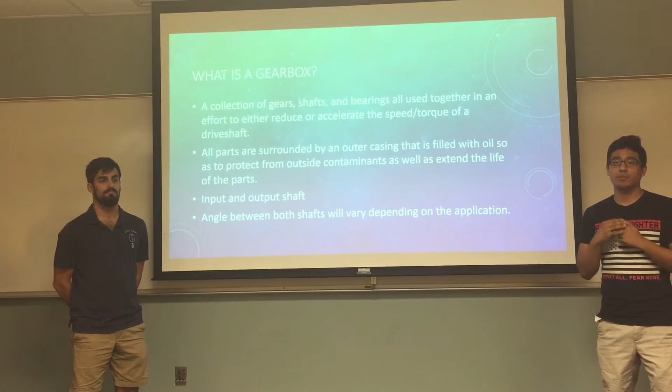A gearbox is a collection of gears, shafts, and bearings all put together in order to be able to reduce or accelerate the speed or torque of the shaft. All the parts surrounded by an outer casing will be filled with oil to protect them, as well as from outside contaminants to extend the life of these parts. We will also have input and output shafts, and the angle between both these shafts will vary, depending on the application.

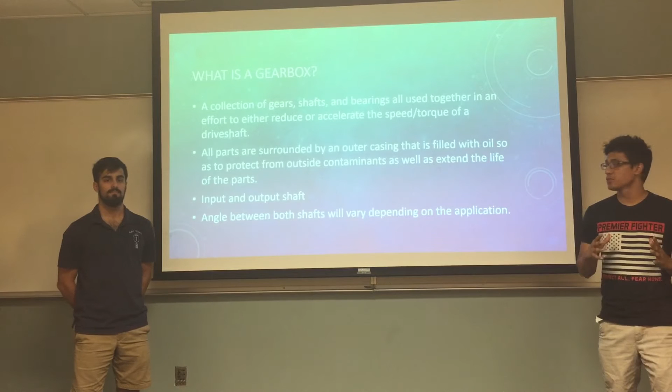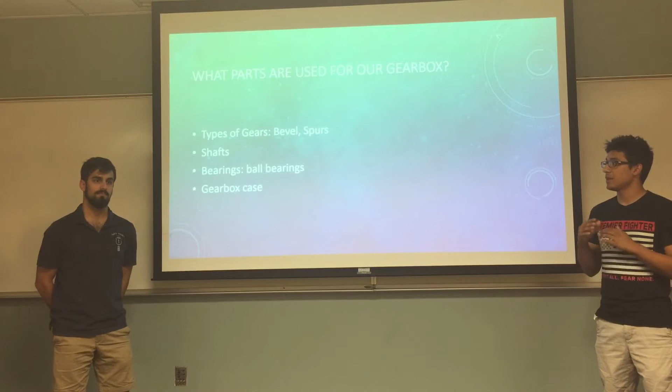The two types of gears we'll be using will be bevel gears and spur gears. We will be having many shafts inside this gearbox. The ball bearings will be used for our bearings, and the gearbox casing will, of course, be surrounding our entire system.

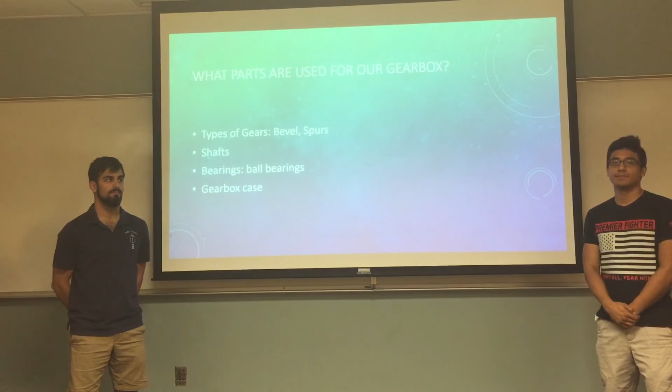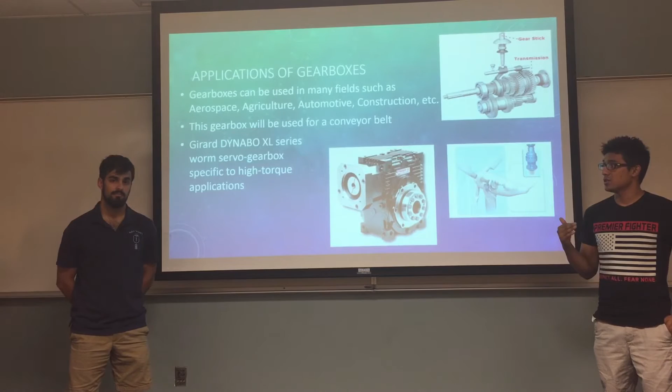Now, some applications for the gearboxes are very diverse in the engineering fields. We have them in agriculture, aerospace, automotive. This gearbox in particular will be used for a conveyor belt, and we did highlight one very good gearbox, the Dynabo XL series, which is specifically tailored to high torque systems.

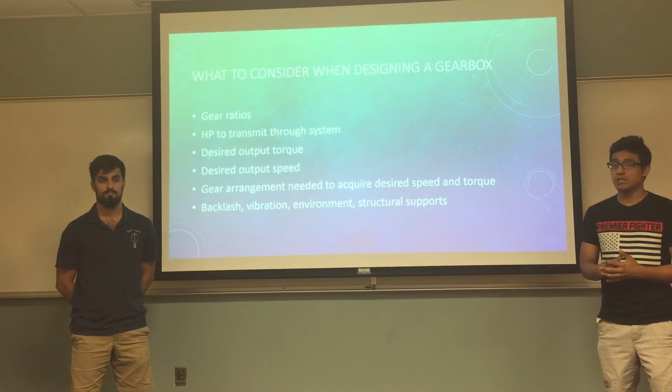So what to consider, we have to take into account the gear ratios, the horsepower to transmit through the system, the desired output torque and speed, as well as the gear arrangement needed in order to make sure that we do achieve this, and of course backlash, vibration, the environment and structural supports that could affect the gearbox itself.

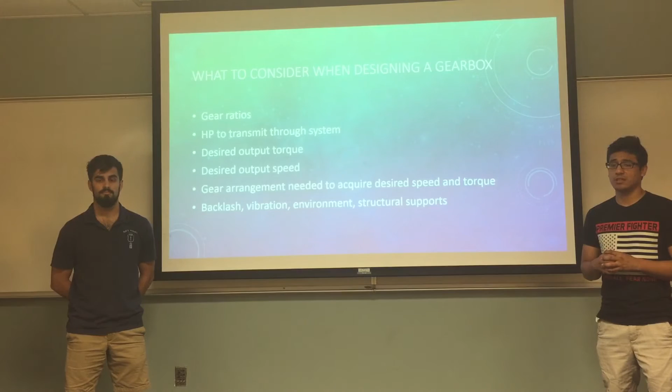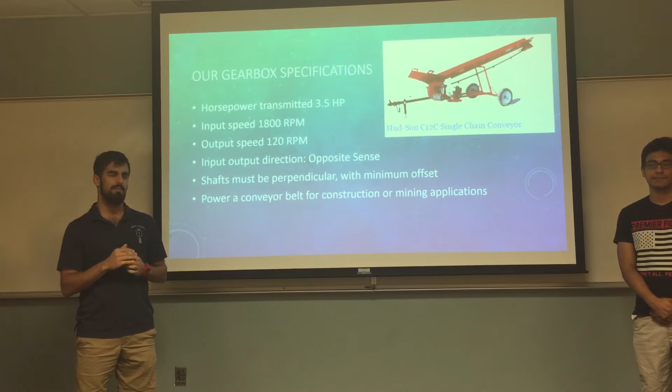Okay, so our specific gearbox, we needed to meet certain specs. So we needed to be able to transmit 3.5 horsepower. We needed also to do a 15-to-1 speed reduction. Our input speed was 1800 RPM. It needed to end up being 120 RPM. So also we had to make a perpendicular output shaft, and we also had to make it spin in the opposite direction.

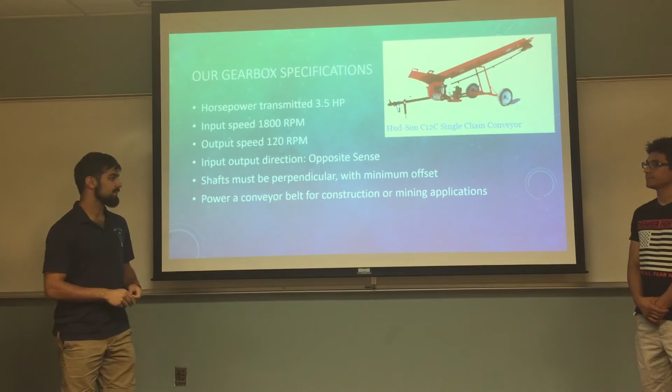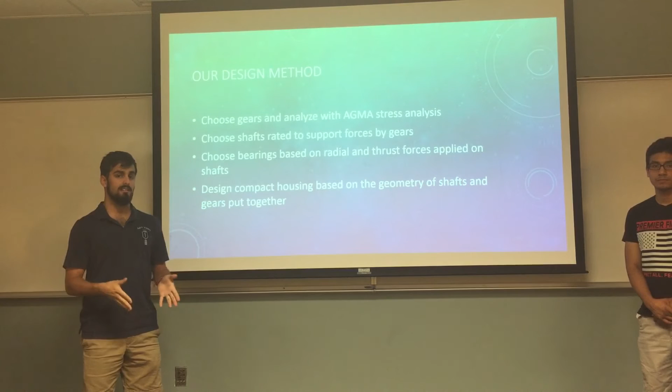So our design method, the things we used to basically pick our gears was based on the Boston Gear catalog. The catalog had many gears inside of it. We had to make sure the horsepower ratings were up to spec so that they would be able to transmit the 3.5. So the gears were also run through AGMA stress analysis for bending and contact wear. We were also able to make a housing for the entire gearbox, and we were able to fit everything inside as compact as we possibly could.

So the types of gears that we use here, there's a picture of it on the right side. We have a 3-to-1 gear reduction with bevels. This is what made the 90-degree output that we needed. We have a spur gear, which is a 2-to-1 reduction to an idler gear, which then goes to a 2.5-to-1 reduction. That makes our 15-to-1 reduction total. We have the last spur gear, which is actually cast iron. That's the only material that was different from the rest of the gears, and it's a pretty good example of what we did.

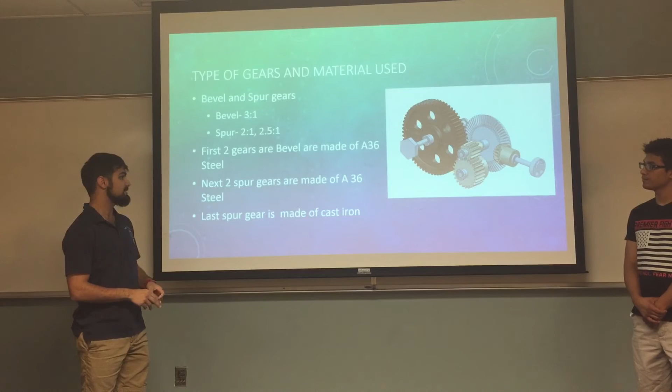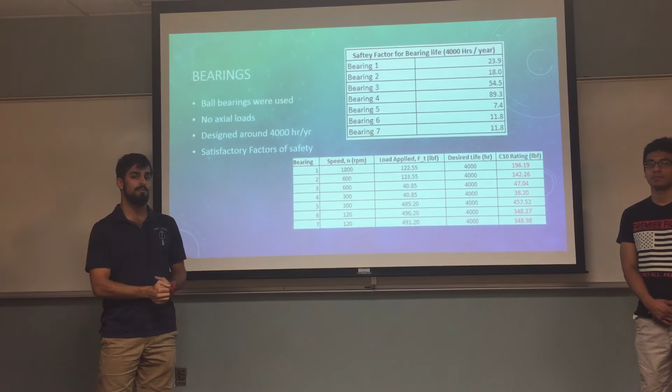Now for the bearings, we just basically had to choose bearings that were able to carry the load of the shafts. We were able to do force analysis on all the shafts, and then these are the bearings that we chose. We also rated them against 4,000 hours per year. When we did factor of safety on that, we were able to see that the factors of safety were very, very good. So the bearings that we chose definitely went above and beyond what we needed.

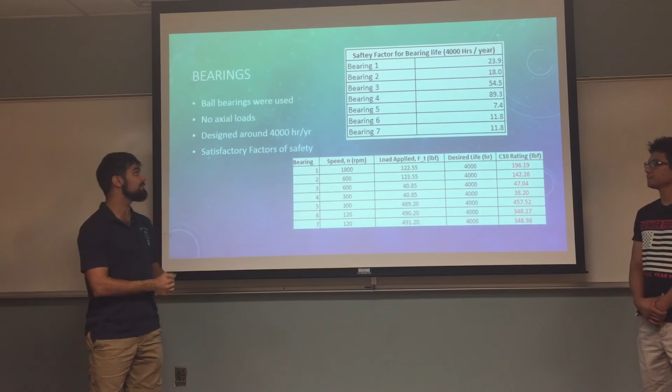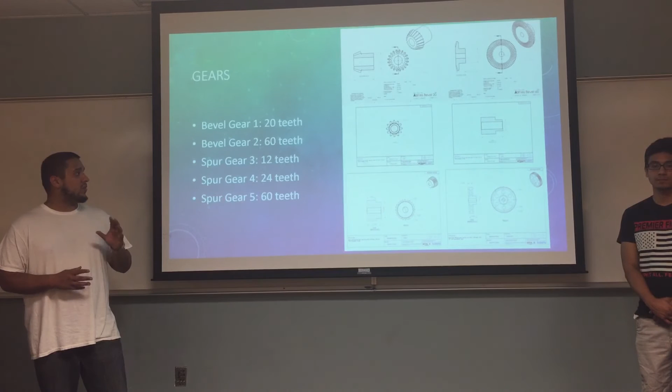Okay, so for the gears in our system, we decided to go with 2 bevel gears and 3 spur gears. Each of them for the bevels had 20 and 60 teeth respectively, and for our spur gears we had 12, 24, and 60 teeth respectively.

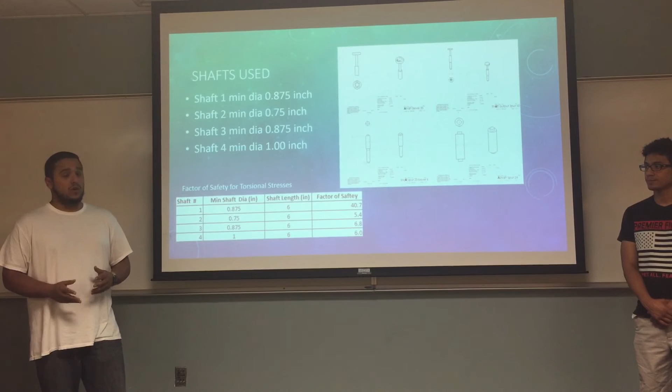So our shafts used were based upon our bore diameters for each particular gear. We had 0.875 inches, 0.75 inches, 0.875, and 1 inch, and gears 2 and 3 had to share the same shaft, and you can see listed here the factor of safety for torsional stresses. Each of our factors of safety were greatly above 1, so they will last a long time without failing.

Now for our bending and wear for gears, we have the factors of safety for our bending stresses and for our wear stresses. Again, for each particular gear, our factors of safety are greater than 1, meaning that they will not fail in the conditions that we set them for.

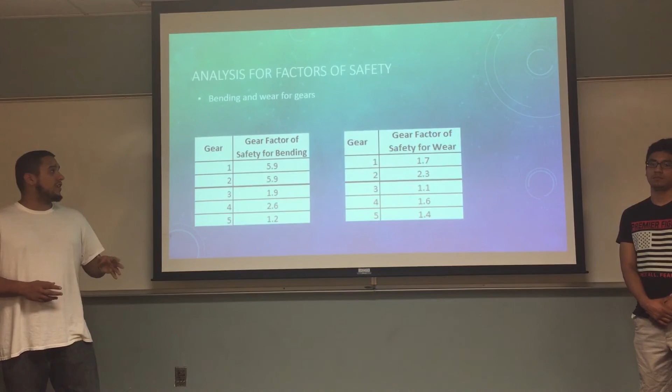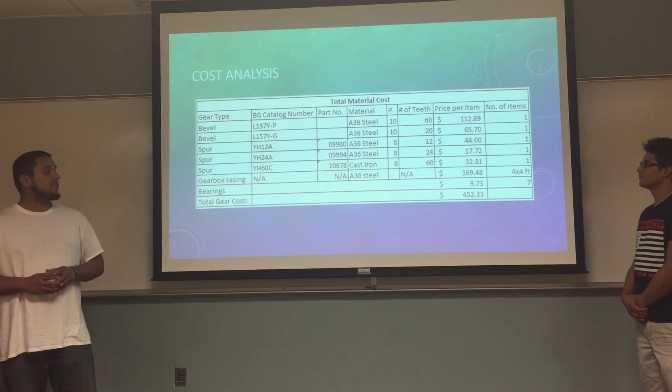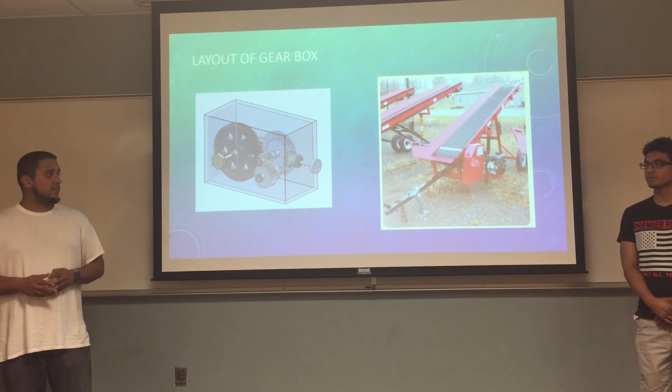On the right here, we have a conveyor belt used for mining applications that also will produce 3.5 horsepower needed to suffice for the job. And here is the actual motion simulation of our system.

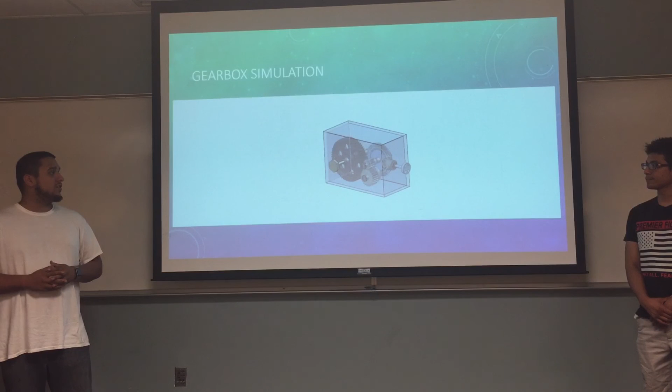In conclusion, many trials were done to pick the correct gears, shafts, and bearings. We ultimately succeeded in creating a perpendicular shaft and lowering our speed from 1800 RPM to 120 RPM and delivering 3.5 horsepower.